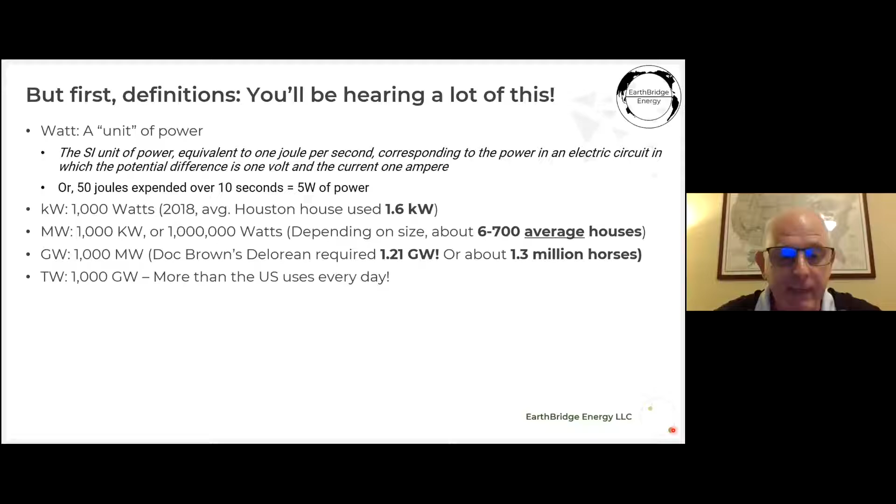It's also about 1.3 million horses. So if you're standing in the street and 1.3 million horses are coming to trample you, they will trample you with 1 gigawatt. It's quite a lot. And another 1,000 up is a terawatt, and that is actually more than the US uses every day.

Other things you may hear: a kilowatt hour. If you use 1 kilowatt for 24 hours, you have used 24 kilowatt hours. Very simple. A megawatt hour is about 1,000 of the above. New York City uses around 11,000 megawatt hours daily, which is around 458, 460 megawatts. So quite a lot of power.

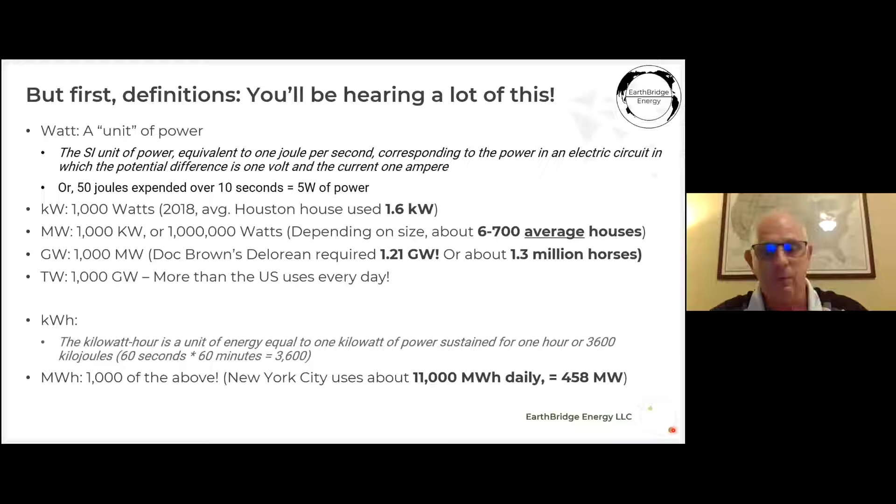I understand that you can write questions in or answer back, but I'd like you to think about it. What has access to abundant energy done for us? Imagine what it would be like if you didn't have energy. Has anyone got any ideas? Anyone want to open up and say something?

Silence is deafening, let's give some clues. We live in the modern day, the modern day life, we rely so much on energy, just about everything we do. Anyone uses the Xbox, you turn the TV on, we're going to do the cooking, dishwasher. Think of what life would be like without energy, without jumping in the car to go down the road. Another thing to think about as we move on is, do you actually worry about leaving a light on when you go out? And if you don't, why not?

Okay guys, someone speak up. How much electrical energy does the US burn through every year? A: 1,000,000 kilowatt hours, which is a gigawatt hour. B: 2 billion kilowatt hours. C: 4,000 billion kilowatt hours. Or D: 2 billion megawatt hours. What do you think, A, B, C, or D?

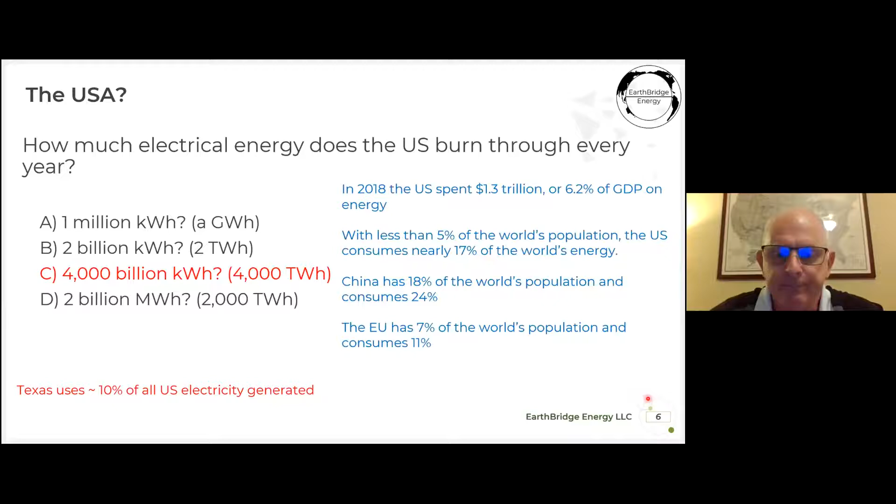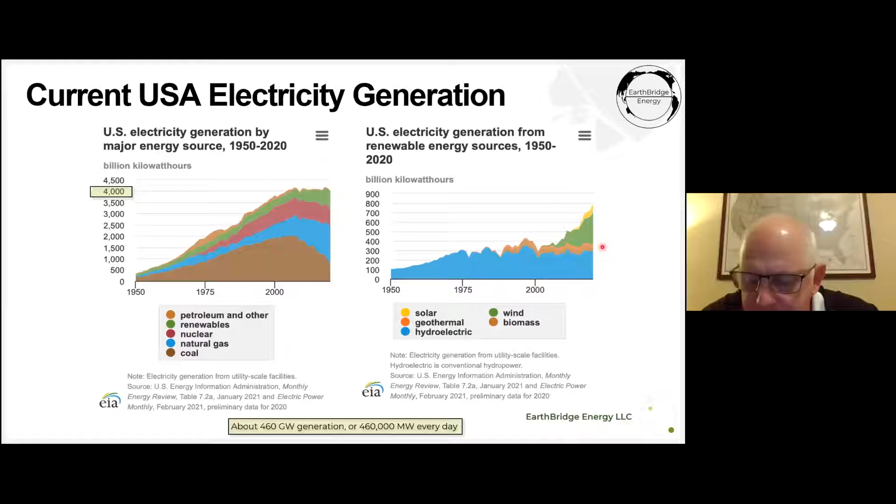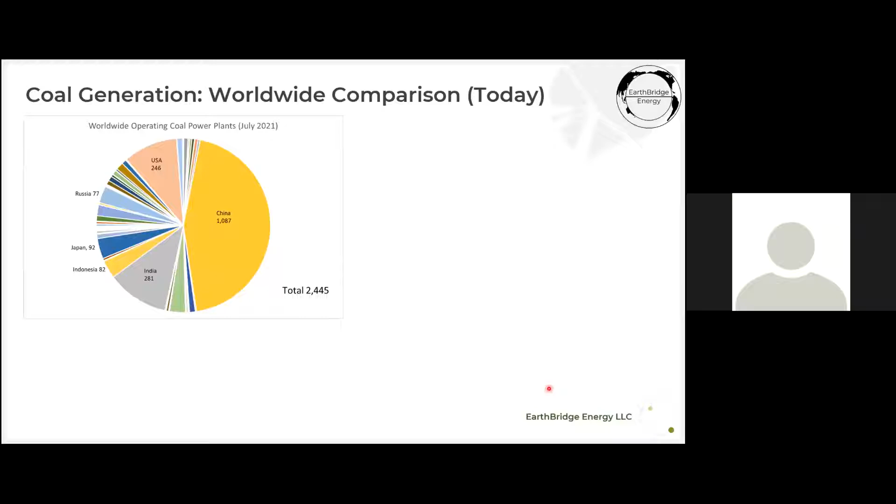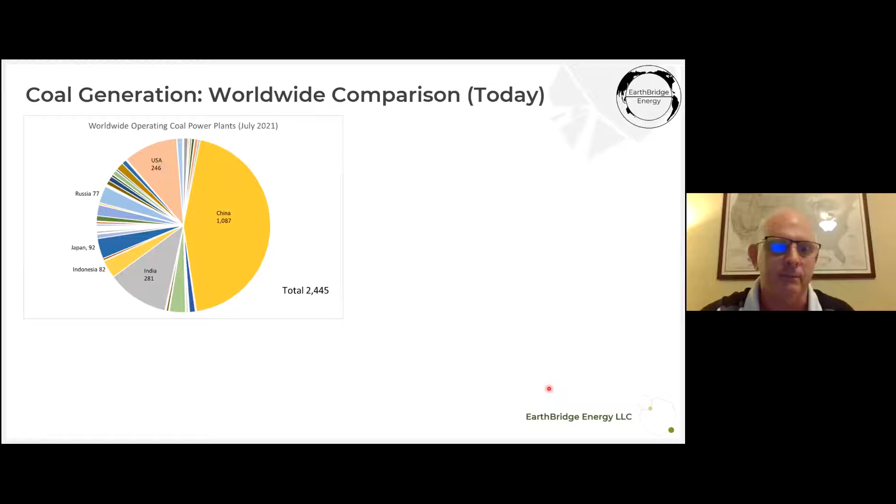Worldwide, as of July 2021, this is the number of operating coal plants. You can see China has by far and away the largest amount, followed by India. The US, as you could have already seen, is actually reducing the amount of coal it's burning, which is a good thing. But China's economy has leapt forward in leaps and bounds, and to power that you need a lot of energy. Coal is something they have in abundance.

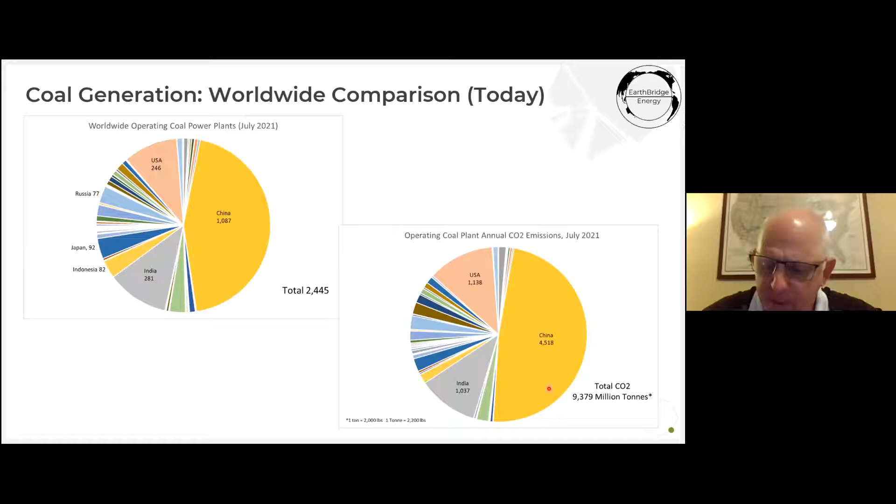Worldwide coal emissions, though, the US is actually just ahead of India, but China is about 4 times as much. That's about 9.4 billion tonnes of CO2 emitted by coal power stations every year. And if you're not worried about that, you really should be. That isn't good.

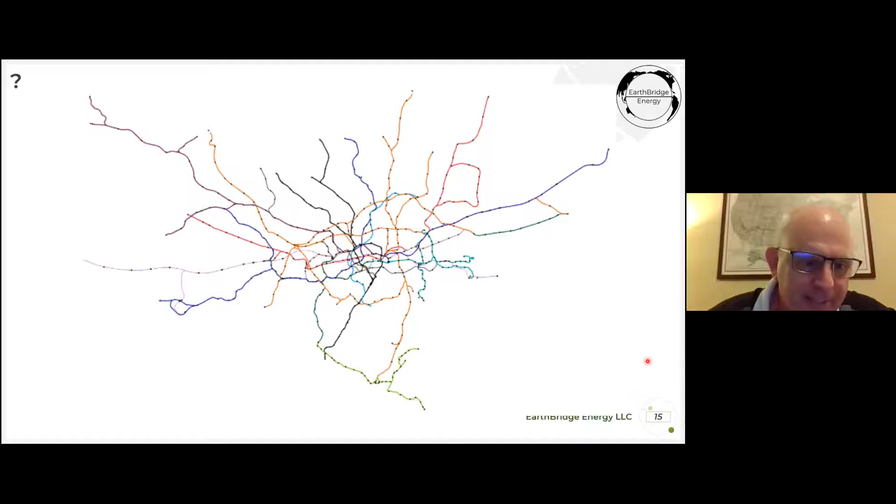Everyone get on chats and tell me what is that and where would you find it. Looks like London - we have an audience member who says it looks like London. Yep, the tubes, that's right. That is London, and Squib has said the tube is right. Mark Stem, DC, I'm sorry, you're wrong - it's London.

Go, how about this one? I'll give you a clue - if you dangle your feet in that river, you're insane. That will be - that's right, Jeanette has replied - Paris, it's the Paris Metro. A bit closer to home.

New York. New York City. Correct. And finally, this one. Real close to home, real close to home.

Come on, people, type it out. Where do you find this? Like Houston's, one track going nowhere. Absolutely right, that is Houston Metro.

Here's a map of London. Okay, let me just show a couple of things. I used to live here. I could walk to here, get a train down to here, and I worked here. I could get a bus or I could walk.

My sister now lives here. You walk to here, you get a train into town. This is about 25 miles from here to here. London actually goes around here, not this bit. It's about 20 miles there to there. So it's very easy to get on a bus or walk to the station.

Houston, on the other hand, we're all up here. I'm almost off the map. I'm down here. Gus lives around here. From here to here is about 25, 30 miles.

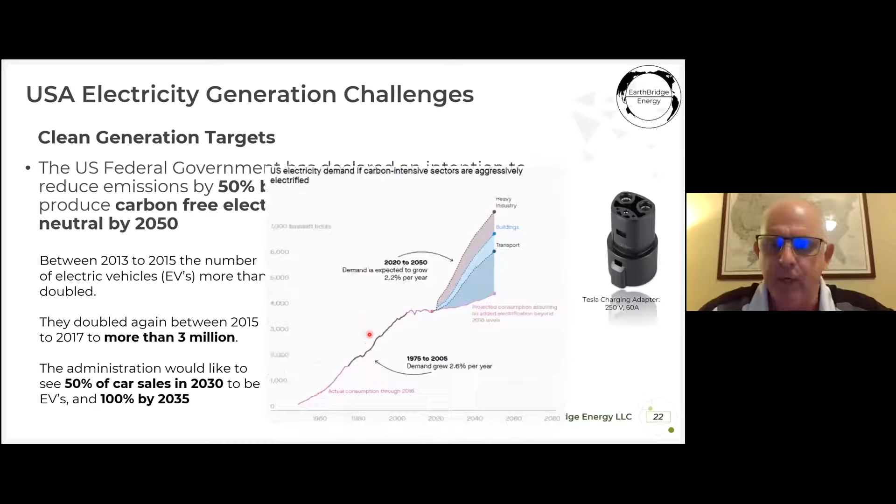Right now, the forecast from the EIA is we'll end up around here by 2050. But if America is to aggressively electrify to meet the transport issues, or the transport forecasts or wishes, if you like,

also power its buildings by electricity and not gas. You may have heard in California, some places they're regulating you can't cook with gas anymore. New houses have to be electric. Heavy industry, electrify it. Your forecast goes from around 5.5 billion kilowatt hours to 7.5.

And it's no use taking gasoline vehicles off the road if you're going to transfer the electrical generation problem somewhere else.

You see, the thing about Houston is realistically, it looks like this. There's a lot of car owners, limited public transport. And if all these people here were to turn to electric vehicles and come home at 6 o'clock at night, and we generate the power by coal, you've increased the problems.

Because for about every kilowatt you burn at the house, a coal, gas or nuclear station has to burn around 2.5 kilowatts because they're not 100% efficient. And just for information there, every gallon of gasoline burned creates 8,887 grams of CO2. That's a very good measurement.

That's about 20 pounds. So you drive off and you burn 10 gallons on average, you've burnt about 200 pounds of CO2. So we really must try and clean up the transport sector.

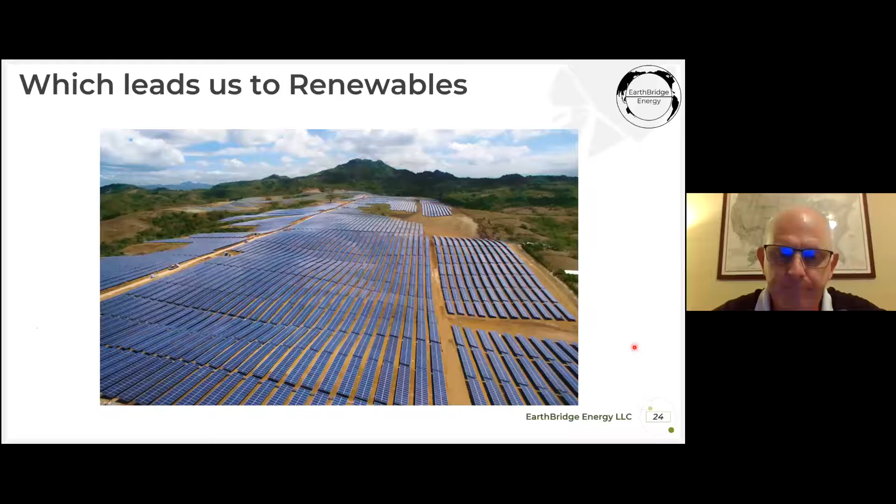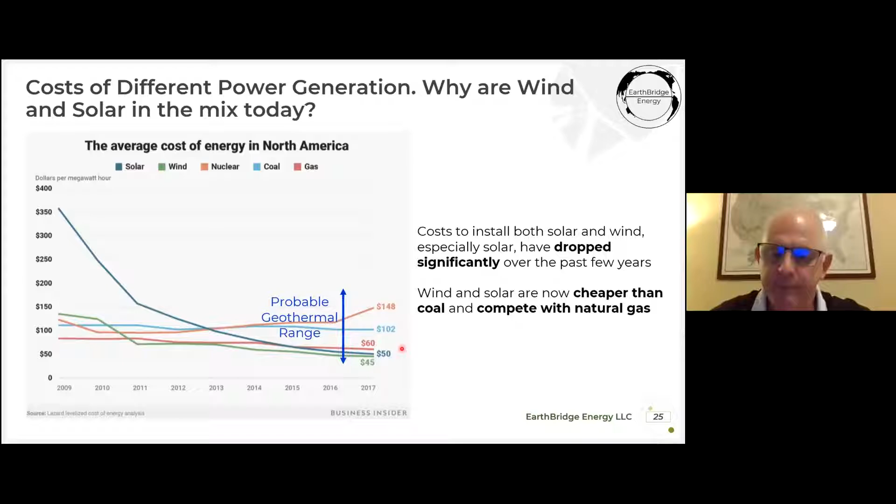Now, there is an issue, and we mentioned it before. Wind and solar are intermittent. In technical terms, we say they're non-dispatchable. You can't just turn them on and off when you feel like it. The sun doesn't shine, you don't have solar. Another thing about solar is they're mainly out in sunny areas. They're also dusty. If you have a big dust storm and dust is deposited all over the panels, they can't produce as much power as they're designed for.

Wind, especially in Europe, has a lot more offshore wind farms being developed. It's windier offshore, and you've just seen in the US they're talking about building an offshore farm in the northeast - very windy. But if the wind isn't blowing and the sun isn't shining, then what do you do? Well today you turn to coal, gas, or nuclear, or hydro if you're in that area. Battery technology, although it is improving - compared to the first batteries ever made, I read somewhere it has improved the power it can hold and distribute only about 4 times for chemical batteries. So any idea that, whatever Tesla says, we're going to put lots of batteries in and solve the problem - it will be a very short-term solution, and they only last a couple of hours.

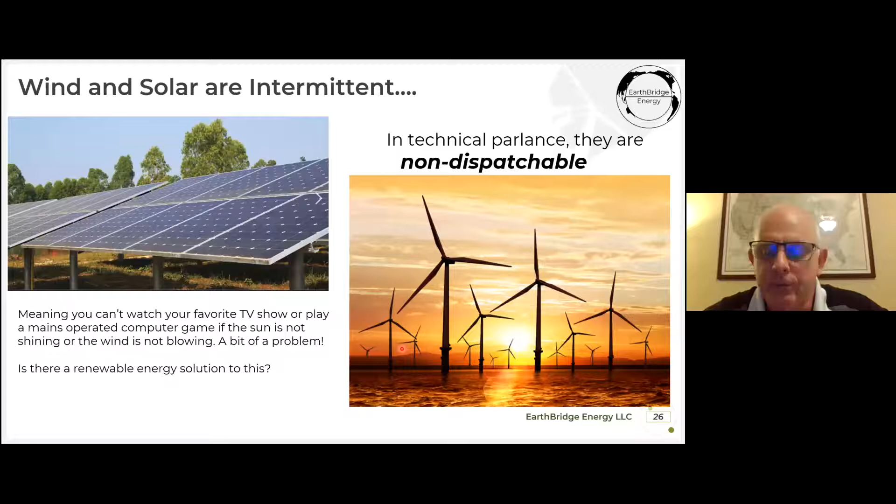But here's a couple of issues with solar and wind that many people don't understand. The capacity factor is an average of how much electricity or power it can create over time. The sun may shine from 7 in the morning to 7 at night, but it's not always at its very height. In the early morning or late afternoon it doesn't give the same energy, and on a cloudy day it doesn't give the same energy either. So we take the high point, nearly 30%. If you came to me and said, Paul, I need 1 megawatt of solar power, I'd have to install 3 megawatts so that on average you would get a megawatt. Now, that's fine, you can do that.

Another thing is the footprint. It's about 60 acres, or 5 to 6 acres per megawatt. A similar geothermal plant will be in 5 acres or less and give you 10 megawatts. In Louisiana right now, the farmers are up in arms with ideas from the state to have more solar because it's covering up the land. And if you're a farmer and your land is being taken off you, you can get upset - you can understand that.

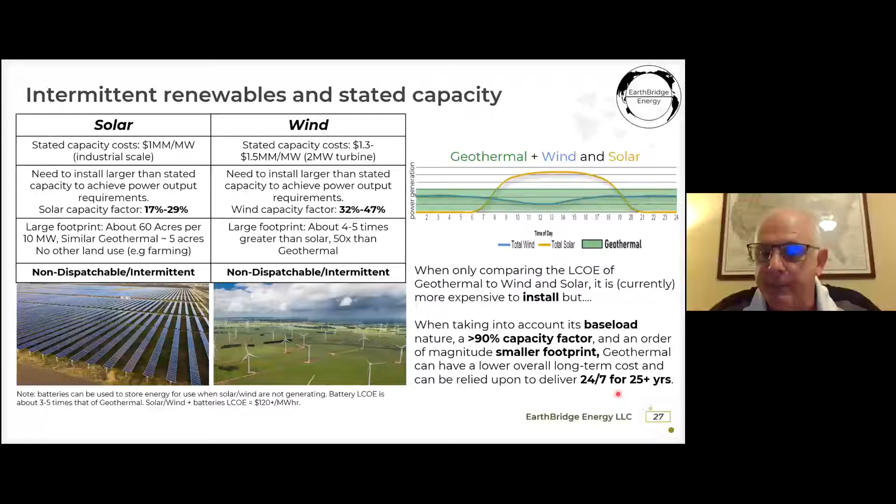So what is it? When we talk about geothermal, it sounds great. It literally is heat within the earth. It comes from those two Greek words, geo, earth, and therm, heat. The thermometer, same word. And it's a renewable energy source because right in the middle of the earth, we have this inner core, which is about 10,800 Fahrenheit or 6,000 centigrade, which is hotter than the surface of the sun. And you can see here as you move up, things do cool down.

But you've seen it on TV, you have volcanoes from time to time. Heat comes to the surface. Iceland is very volcanic, we'll mention that in a minute. You also go to places like Yellowstone, you see the geysers, very, very hot water. So not too far under our feet, depending on where you are, it could be anywhere between say 1,000 feet down to 10 or 15, 20,000 feet. It's a lot of heat energy.

For those of us who've worked in the oil industry, especially people like me who've also worked offshore from time to time in a freezing North Sea, when the wind is blowing through those platforms and you wish you were somewhere else like the Sahara Desert, you can wrap yourself around one of the oil export lines and it is really hot. So there is a lot of heat. In fact, the Earth emits more heat every day - it could feed the Earth's electricity demands over twice as much.

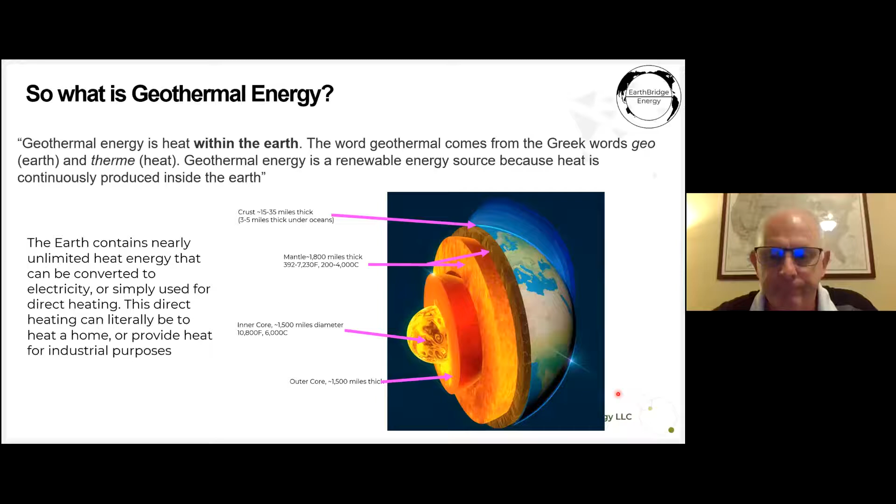Worldwide, this might surprise you, the US is number one, mainly in California. There is a plant in California which produces well over 120 or 130 megawatts of electricity. That takes its power virtually from a direct steam source, which is very powerful. And there are other ones around which take it from hot water.

Now, the majority of the world's geothermal is near heat sources. If you look around here, you've probably heard of the Ring of Fire in the Pacific Ocean. There's a lot of volcanoes around here, earthquakes, very famous - San Francisco, of course, Mount Hood up here, the volcanoes. So all around here, the Ring of Fire, there's a lot of heat near the surface. In New Zealand, you can go and watch it bubbling up from the surface in mud pools.

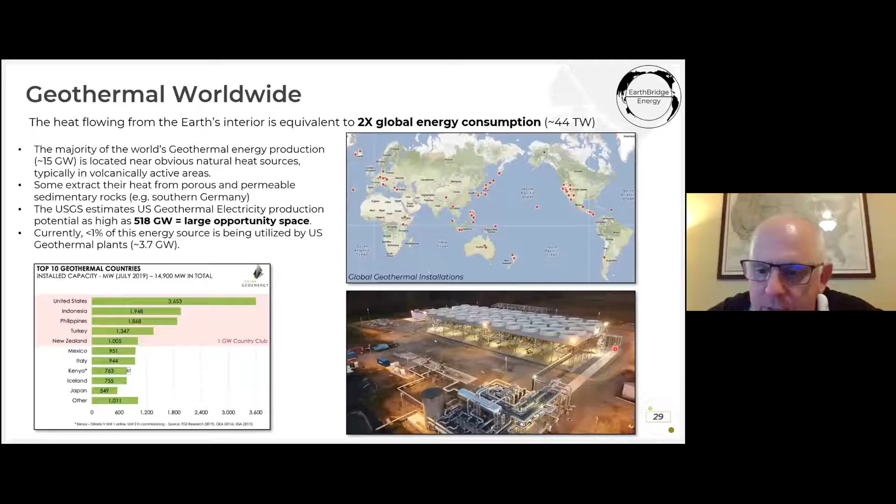Iceland is another area, strong volcanic activity. And in Europe, there's quite a few smaller plants which are taking hot water out of the ground and using that. By the way, we'll come back, I'll show you a picture of this in daytime - that's how small a plant can be, you could put a person next to that. The biggest thing is this area we'll discuss, but they're actually very small and emission free.

What types and uses? In this blue box here is the kind of temperature range we're looking for to produce water from the ground. Anything over that, it's so hot it actually is steam, and you can use that steam directly as in a conventional power station to go straight to the turbine. I will explain why we're in this area, and I'll come back later on and show you the many other things you can do with geothermal aside from making electricity.

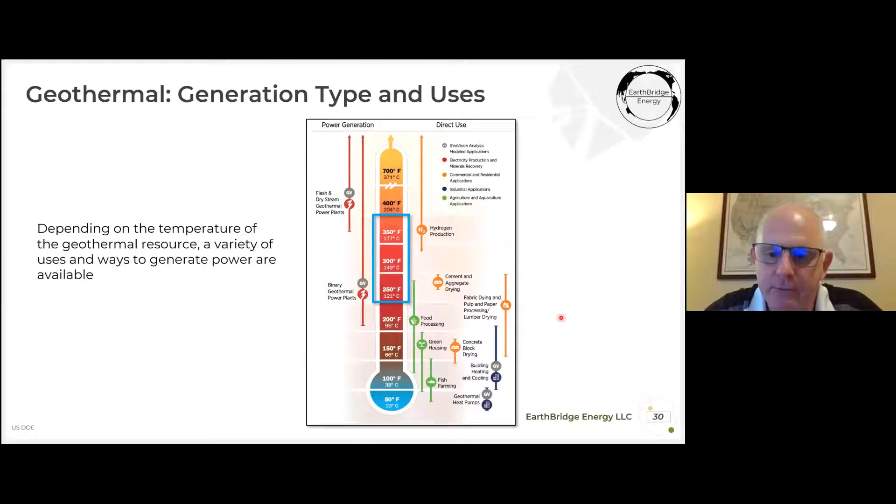This is what we are looking at as a company. We're looking at what's called sedimentary geothermal. I'm sure many of you here know the oil industry quite well, maybe through parents or friends working at it. A lot of the conventional reservoirs we produce from, like sandstone, for example.

If you put those under a microscope, they are full of holes. Anywhere between 15 to 20% of the rock you're looking at is empty, and that's what contains the oil, water, and gas. Now, what we're looking for isn't oil or gas, it's just the water. And at the depths they're at, they're very hot. These reservoirs are also what we call very permeable, which means the liquids can flow through them very, very easily.

So you don't need to frack it. Fracking means you need a lot of energy at the surface to pump water and chemicals down and sand to keep it apart.

We know these reservoirs here very well. What we would do here is take the hot water out. It flows out the ground, goes into your organic Rankine cycle plant, and the cooler water is injected back in. Through time, it makes its way back to the producing well, and as it heats up, it comes back and it cycles. So you maintain the reservoir pressure.

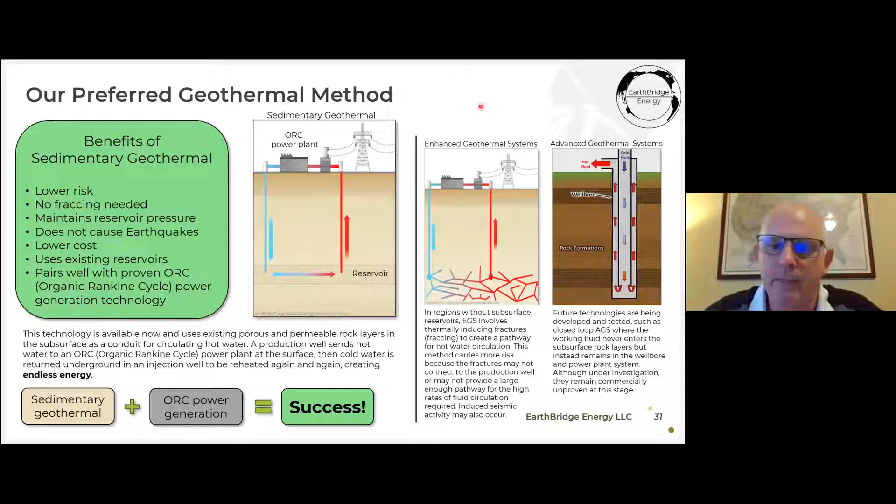Someone said, is geothermal energy centered around fault lines? The answer is yes, it can be. We can discuss that later on with the questions. Yeah, Paul, I was going to hold them till the end if it's okay. Yeah, that's fine. Okay.

Just a quick look. How is electricity generated, in case you don't know? They're called thermal plants because you're heating them up. Some people say they don't want nuclear because the electricity is nuclear. It's rubbish. Coal, gas, oil, nuclear - what it is, basically, is it heats up water in a boiler, turns to steam. The steam drives the turbine, drives a generator, and that produces electricity to your home.

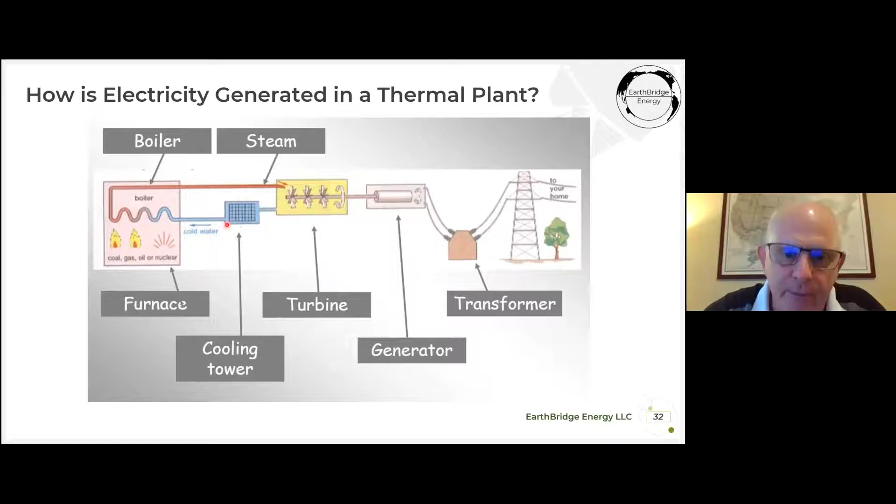So what's the difference? There's a cooling tower. When the water comes back out, you've got to turn it back into water again to reheat it, to make it efficiently turn the turbine - water, steam, turbine, etc. It just goes around in a circle.

I'll try my best to explain this.

It's very simple, really. In the organic Rankine generation plant, the water from the reservoirs isn't hot enough to drive a turbine. But what you do is go through what we call an evaporator, regenerator, and condenser. They're all heat exchangers. That's all it is.

The heat is taken from the hot water into a fluid which is organic, like butane or pentane. It has a lower boiling point, which means it will turn to the equivalent of steam at a lower temperature. That steam then drives the turbine, which drives a generator.

The fluid is then taken back to the regenerator, into the condenser and a heat sink. This is where the heat is taken out of it. We'll see a picture in a minute showing you that most of the plant is actually taken up by taking the heat back out of the organic fluid, so it can be pumped back into the heat exchangers to be used again.

There are over 450 of these plants in the world today producing electricity, and about 20 in the US. It's been proven, and the technology is improving all the time.

Another thing is, we talk about the reservoir, but other heat sources are viable. This technology is used a lot. You may have heard of people taking wasted heat energy up flues or chimneys in factories and turning it into power. They use the organic Rankine cycle. Instead of hot water from a reservoir, they use hot flue gases in the heat exchanger, heat up the fluid, and drive turbines. This technology comes after a guy called Rankine, a Scottish guy who died around 1870 or 1880. This isn't new physical theory.

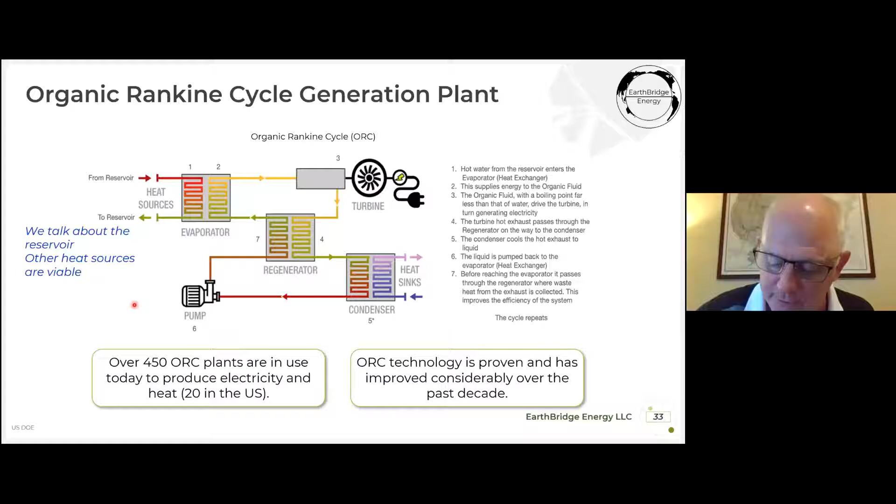Unfortunately, the ORC plant isn't 100% efficient and not all of it is turned into power, but water contains a lot of energy. Just remember that.

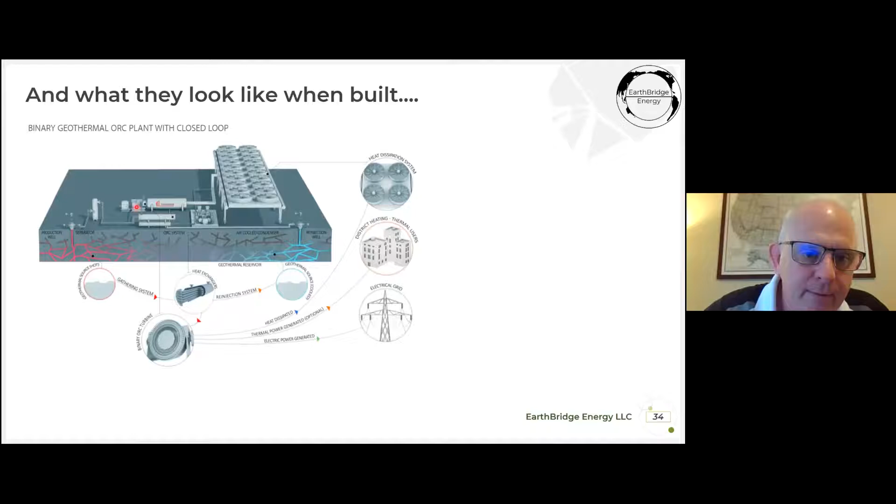What do they look like when they're built? Well, there's your well, there's a separator, it goes into the heat exchanger, through the turbine, and all of these are to cool it off through recycle, if you like, it goes back round. The organic fluid goes back round here, and it just repeats. Instead of water steam, it's an organic steam. And that's what it looks like.

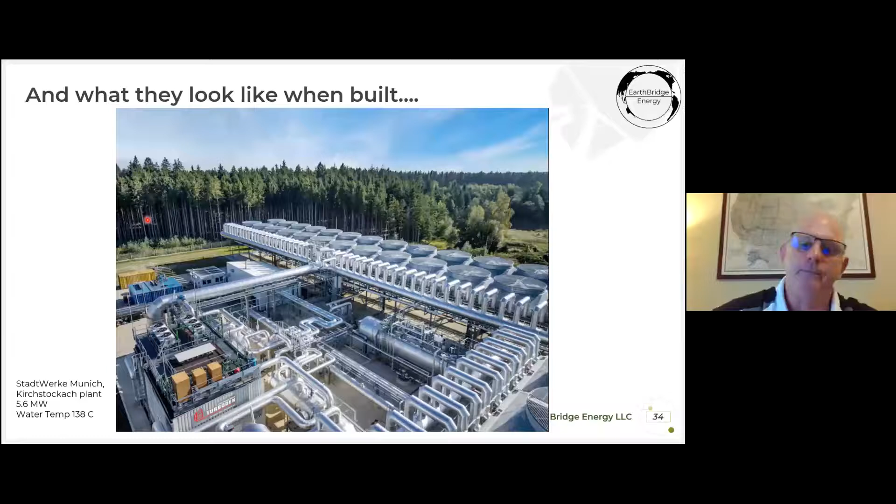So we're talking about this bit here, binary geothermal power plants, 200 to 350 Fahrenheit, around 100 degrees C up to say 200. Look at all the other things you can do.

Around here, for example, they're doing this a lot in Germany and Iceland. You take the hot water and pipe it to houses to heat the house up. But look at all these as well: onion and garlic drying, food processing, lumber drying, soft drink carbonation, geothermal heat pumps.

People are talking about this a lot recently, about new houses being built and taking the heat from the earth in your own backyard. So there is a lot of stuff you can do with geothermal. You don't just have to turn it into electricity. You may have what's called dual plants where you create electricity and also send the water to district heating.

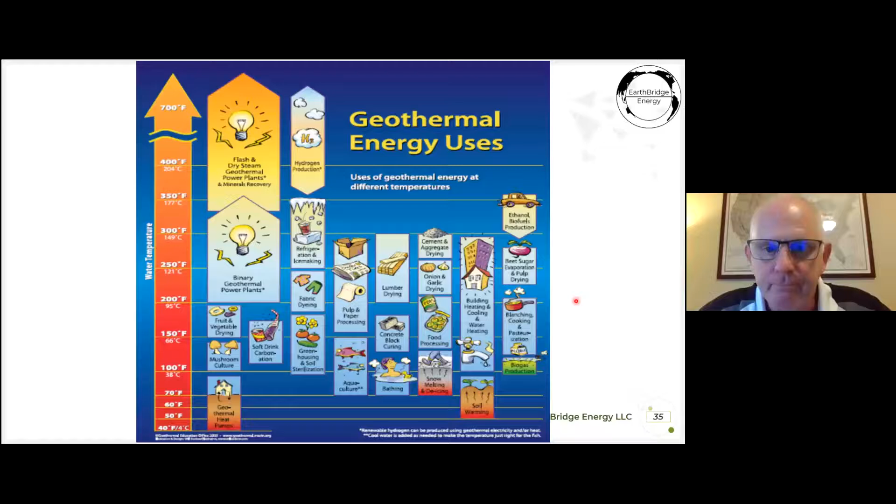In Iceland, it's a very hot place. Almost every building in the country is heated by hot spring water, and more than 50% of its power is from geothermal sources. They are wisely using something that's been handed to them free.

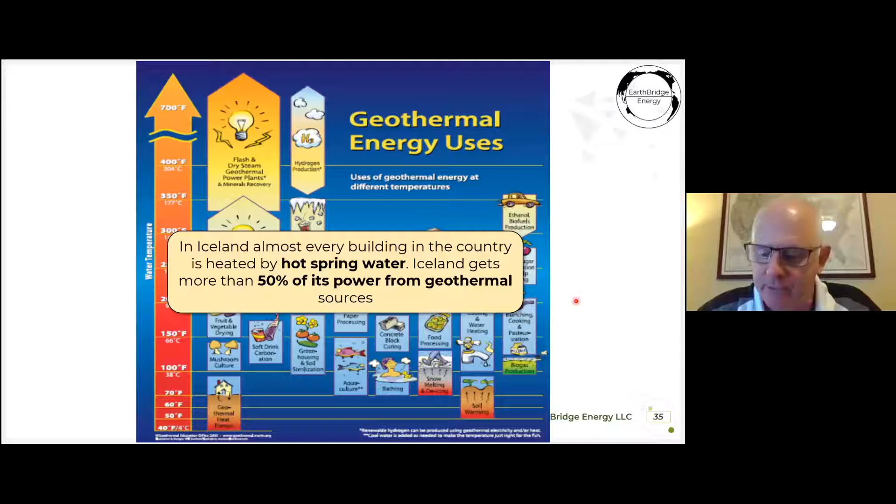One of the issues we have with electricity, outside of things like hydro where you can fill up your dam and store energy, is that you can't store energy from solar very easily. The batteries we spoke about can hold a charge for a couple of hours, and they don't give out as much energy as you need. The whole city of Houston would need thousands of batteries, and you'd drain them very quickly.

But I just told you that water contains a lot of energy. What we find sometimes in some parts of the country, wind in Colorado, wind and solar in Texas, is that they can generate so much electricity it can't be used. What happens is the authorities give them very low pricing, or even negative pricing, trying to dissuade them from putting their power into the grid.

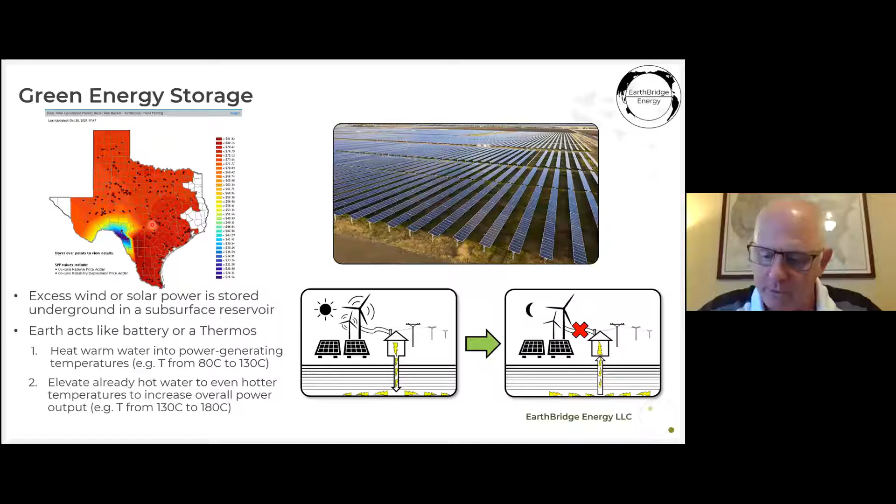If you could take that power, literally while it's free, and heat up the water as you pump it back into the ground, that energy would be stored for later use. You could make your reservoir even hotter than it was to begin with, or at least maintain power. Because it's already down in a very hot environment, it will not lose that energy very quickly. When you need it, you can tap it and use it. This is what we call an earth battery idea, and it's something we'd like to look into further.

There's a few facts about geothermal. They're subject to the same environmental considerations as the oil and gas sector, which has many laws about the environment. Whatever you might think you heard in Congress today, Derek, Gus, we've all worked in it, and I'm very proud to work with companies who do take it seriously. In places like Texas, you need to drill wells for geothermal, and all these laws already exist. It's not as if we're going to the government saying we want to try something different and waiting years for them to understand it.

I don't know how many wells have been drilled in Texas. I wouldn't even like to hazard a guess, but it's probably going to be a million plus. And we know very well now how to protect ground drinking water and stuff. Very, very strict on that.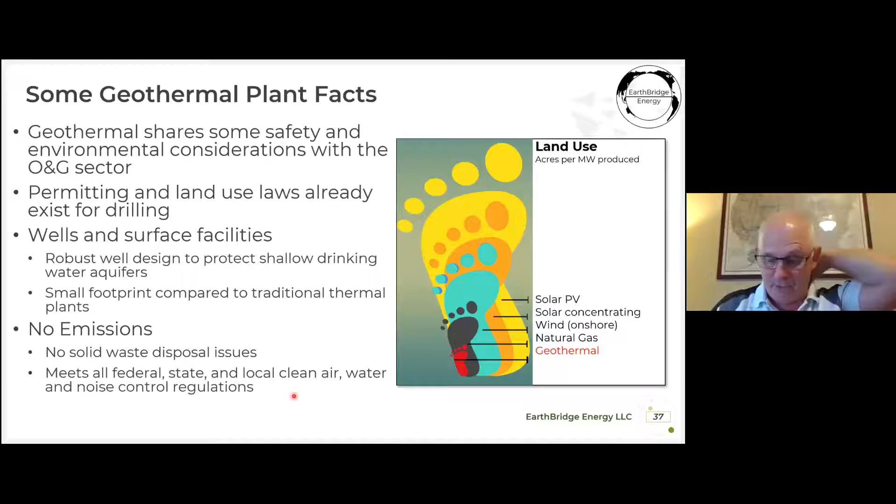Another thing about geothermal, we said no emissions. You may remember looking back at the coal-fired power station, I didn't mention this at the time, but one of the byproducts isn't just carbon and sulfur, it's ash. When you finish burning coal, it hasn't completely disappeared. You have lots of sludge left, lots of bits of burnt coal, and you have to dispose of that. Again, with geothermal, you don't have to do that. It will meet all the federal, state, and local clean air, water, and noise control regulations. These plants are almost silent. The only moving part really is the turbine, and that's going to be in a box. You don't hear it.

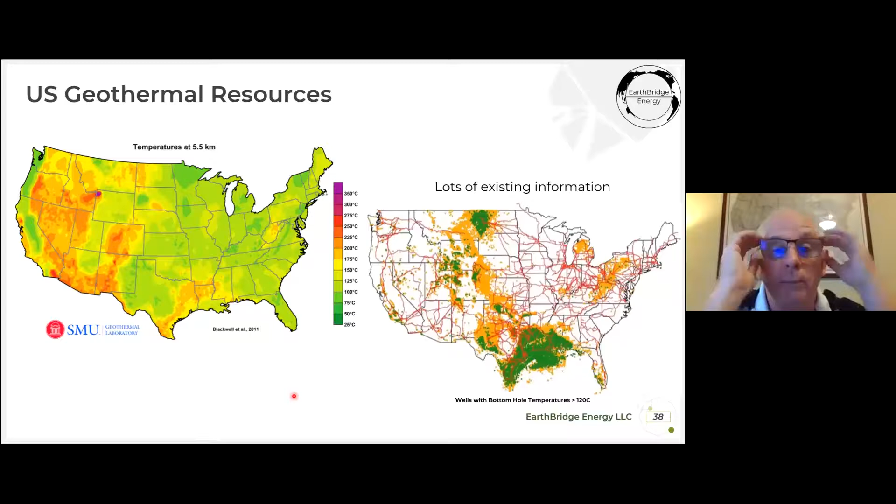So where do we find these geothermal resources? The map on the left shows temperatures that we know of at 5.5 kilometers, or about 5,500 meters, roughly 18,000 feet. That is quite deep. You'll notice that all the warm colors, the oranges, yellows, reds, fall around here in the west, but there's a big swathe right through the Gulf Coast of Texas and a little bit up in West Virginia.

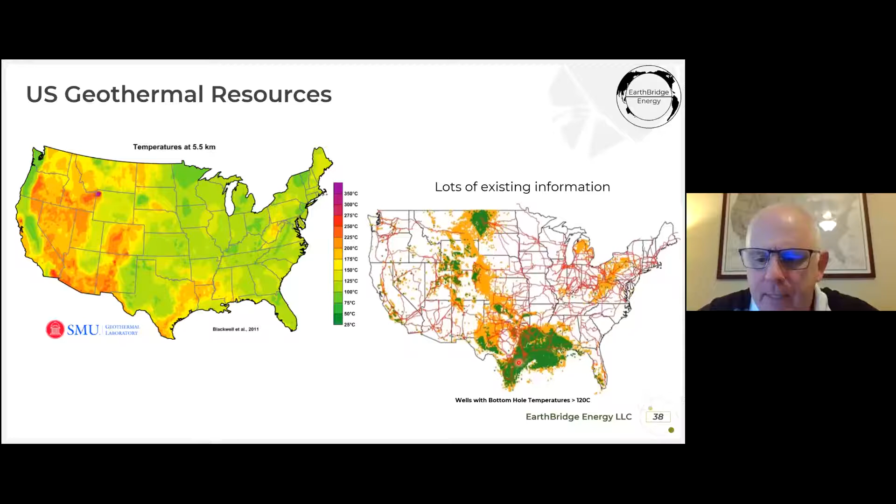This map here, which looks like a rash, shows wells with bottom hole temperatures greater than 120 degrees centigrade, which is the low side of the temperature you need to start making geothermal work. Some of these will be 180, 200 degrees. You can also see that Texas is awash with data, look at the points here. This is the Marcellus over here, this is the Bakken, the Permian Basin. The amount of wells drilled here is phenomenal. We have a lot of information about these reservoirs, and that's very important, as we'll see why.

You're going to say, why are there so few geothermal plants today? Well, the cost of geothermal is quite expensive compared to conventional, unless it's situated right next to a hot spring or steam vent. Someone asked about faulting, yes, faults can transmit steam to the surface. The energy of steam vents is substantially higher than water. If I remember rightly, you can get 4,200 joules out of a litre of water for a 1 degree drop. If you turn that into steam, it's like 2.6 million joules. There's a lot of energy in steam.

Thanks to fracking, natural gas prices changed a lot. Around 2009-10 when I was here, natural gas was going up to $11 to $12 per 1,000 cubic feet. It dropped down to less than $1 a few years back, and it's rising again now to around 4 or 5, but it's a lot cheaper than it would have been without fracking. Gas emissions are about 40% that of coal, so it's called a displacement fuel. It got cheap enough to be cheaper than coal, and fortunately it's also a lot cleaner, but it's not fully clean.

There's enough electricity being generated that you can see here on this map, around 2007-8, coal bars start getting smaller as natural gas starts coming up.

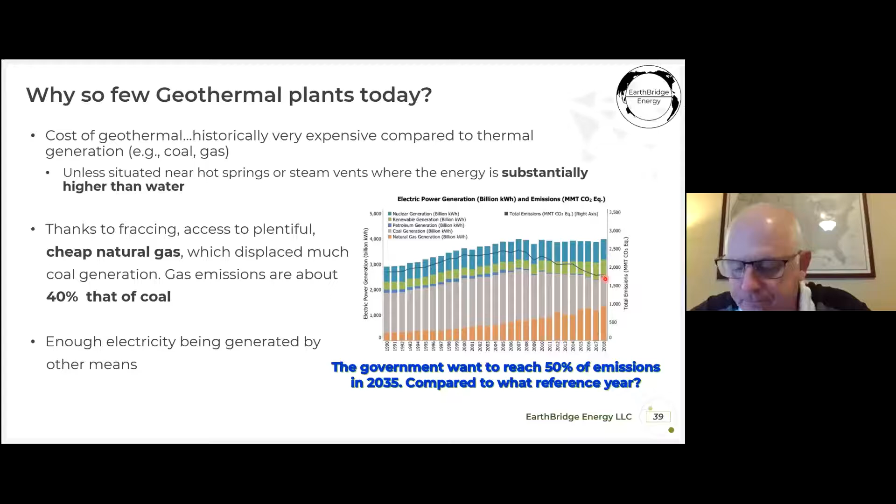Another thing about geothermal, this is an issue many investors have seen in the past. If you don't know what's there, like in oil and gas, you need to explore. You need a pre-survey and exploration. This normally involves seismic work, understanding all the squiggly lines people like Derek look at, saying this looks like an area we could explore in, drilling a well at great expense, testing, and so on.

And then you decide, do I have enough resource to develop this oil field? In places like Texas, though, with so many wells drilled, in the vast majority of cases we can eliminate these costs because we have the information. Millions of wells, hundreds of thousands of data points in the Texas Railroad Commission, telling you a lot about the permeability, the rock type, the temperature, the flow rates - all the things you used to spend millions and millions of dollars on, you don't have to.

Our task is to reduce these costs of well field development. Geothermal plants cost whatever the plant costs for that rating, say 10 megawatts, 20 megawatts. But depending on the quality of the resource, that will depend on the number of wells you need to drill. The fewer wells you need to drill, the cheaper it is, the cheaper the electricity. That's the challenge we're facing. One advantage of the oil and gas industry is that there are many people with this kind of experience now moving into this sphere.

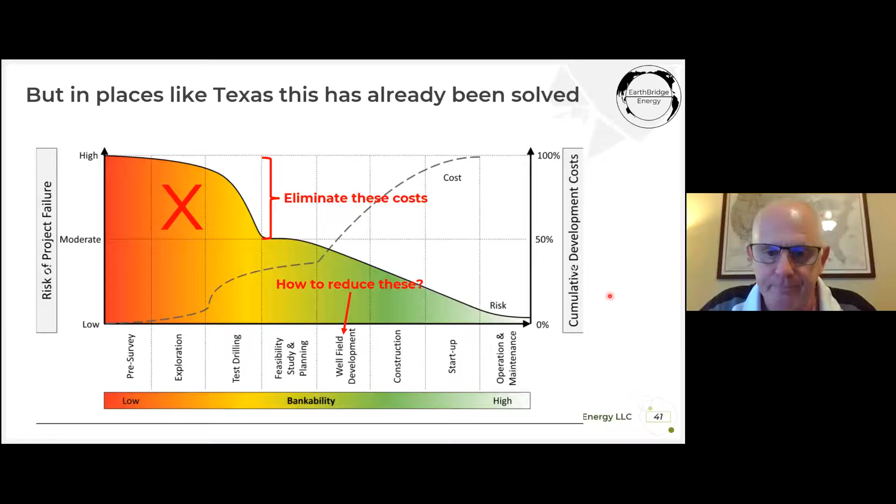So they're looking for other forms of investment. There's many things you can invest in, obviously, but energy use in the developed and developing world is set to increase. And if we're going to do this successfully and keep our planet from warming too much, we need to look at alternatives. Investors are now looking to invest in greener fuels. Solar and wind have already had lots of investment. We think geothermal is going to be the next.

Another thing is how prices drop. If demand goes up and people want more, manufacturers tend to produce more, and as they manufacture more and get more efficient at it, the prices drop. That's an example with solar. Utility tracking, by the way, is expensive solar - that's where it follows the sun. But don't worry about all the three types shown there - the fact is the costs are coming down.

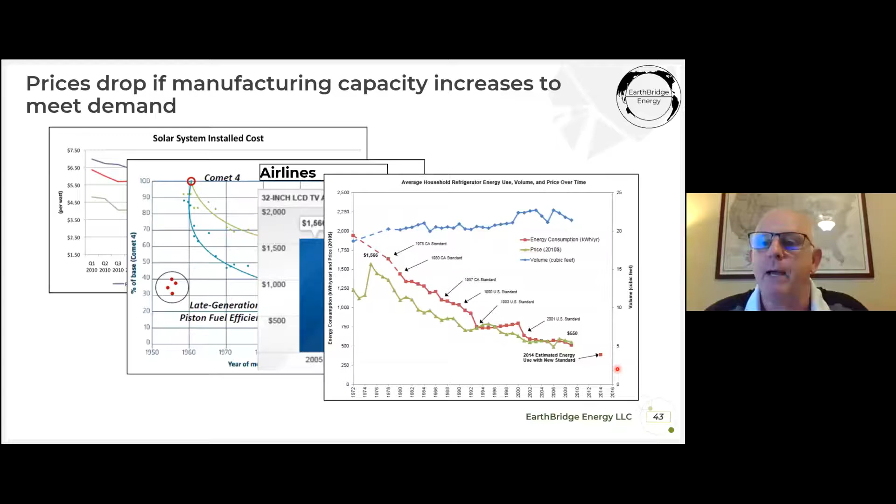100 years ago, most people listening here probably couldn't afford a car. Now we're a 4-car family. Things are getting cheaper. We believe the same thing would happen in geothermal—if we and other people can start this off, the people who make the plants will be able to drop their prices, and therefore it will become cheaper to develop, the same as other energy we've seen like solar.

But renewables of all kinds do have a bit of an issue today, and that issue is it depends on your location.

You've seen this map already. By the way, does anyone know what this little dot is here? Yellowstone, yes. This would be the perfect place to put a geothermal plant.

I don't know if you've been there, I have. It's one of the most amazing places. I've been to over 45 countries, and this is one of my favorite places. Keep it pristine, but it's a great example of energy coming to the surface that can be used if you so wanted to.

Okay, if we're in the solar business, you look at this map—photovoltaic solar resources. As you can see, Southwest Texas, New Mexico, Arizona into Southern California, and Utah have a lot of sun hours. This is in kilowatt hours per meter squared per day, and it goes up quite a lot. The sun gives a lot of energy.

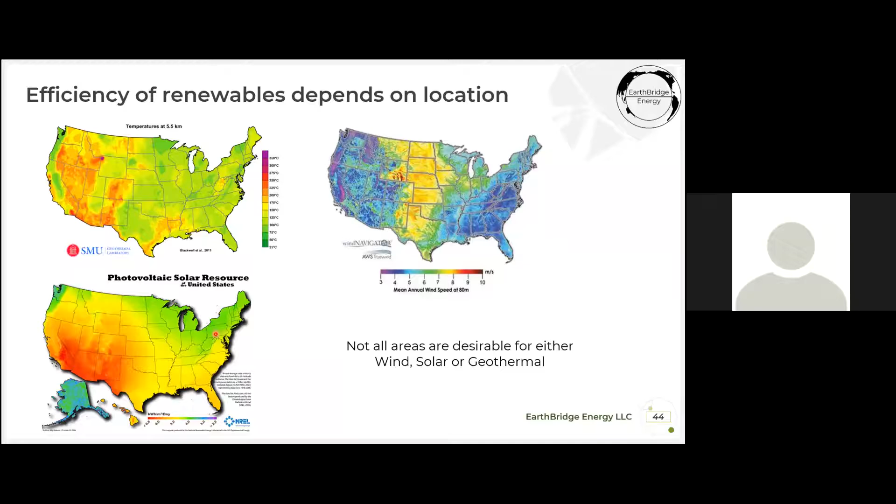Anyone like me knows if you stand out too long, I turn into this color. But if you're up here, you can still put solar in—just expect it to be generating the same kind of power as this does.

Wind—remember, I showed you where all the power stations were, and I might have mentioned there's a whole swathe of wind generation through here. Well, here's why: this is the mean annual wind speed at 80 meters. It has to be off the ground.

So when people say, oh yeah, the politicians like to take credit for things—we've got a lot of wind. If I was going to spend $1 million on a windmill, I'd rather put it up here and generate twice the power as putting it down here.

The reason you have wind here and solar here and geothermal in some of these areas is that's where the resource allows it. If you're up here, you don't get much sun, you don't get much wind, and you don't get much temperature—so you could easily put a gas or coal power station there. This is the challenge we're facing.

I don't want to give anyone the impression that, hey, we've got the solutions and it's easy to solve—there are challenges involved. But up here, this area...

Offshore, you get a lot of wind, and this is why they're putting wind farms in here. If you fly from Paris or Amsterdam to Aberdeen in Scotland, you'll go over what's called the Dogger Bank off Yorkshire, the east coast of England. You'll see hundreds and hundreds of windmills. And Scotland has just signed an agreement to build the largest offshore wind farm in the northwest of Scotland.

I lived in Scotland for years—my wife comes from there. I can tell you it's a pretty cold, windy place sometimes. They will get a lot of energy.

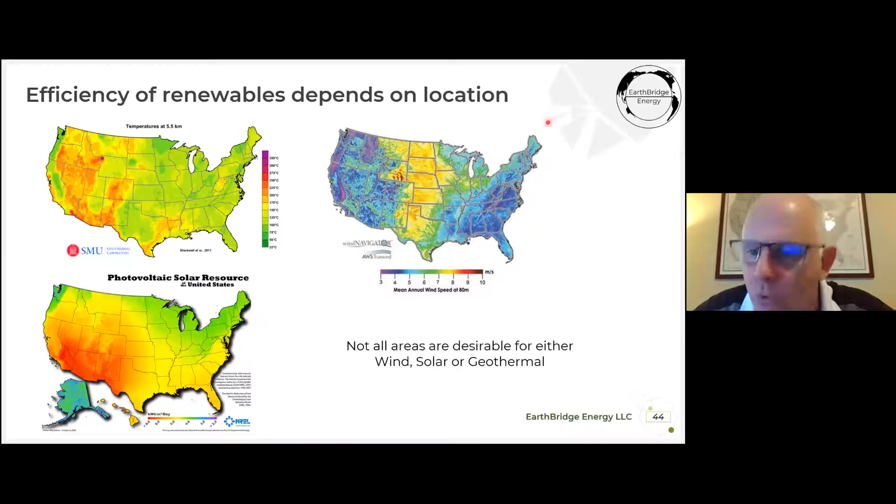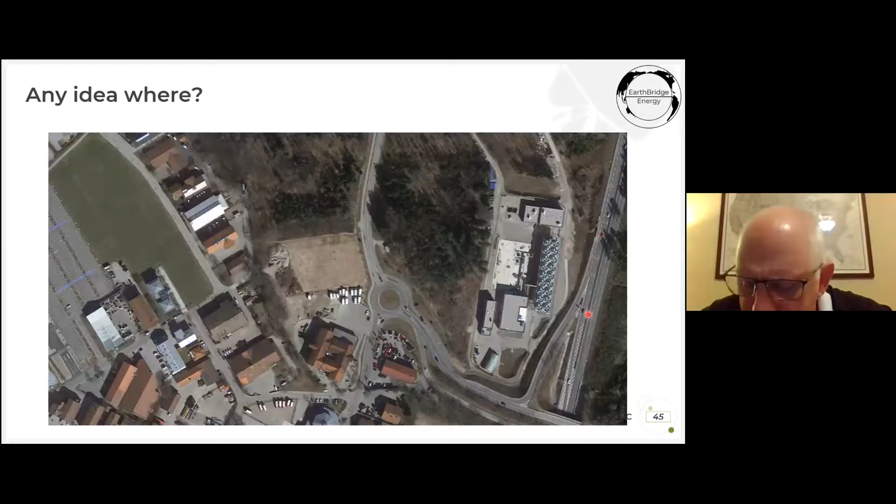And there's something here that looks quite interesting, though. I feel like a spy. You zoom in and it's getting a bit more suspicious. Must be a CIA plant. Actually, no, it's a geothermal plant just on the outskirts of the city, hidden behind the trees and the berm here. Most people there probably don't even know that the majority of their power comes from a geothermal source, which quite frankly is placed next to where they live or where their kids go.

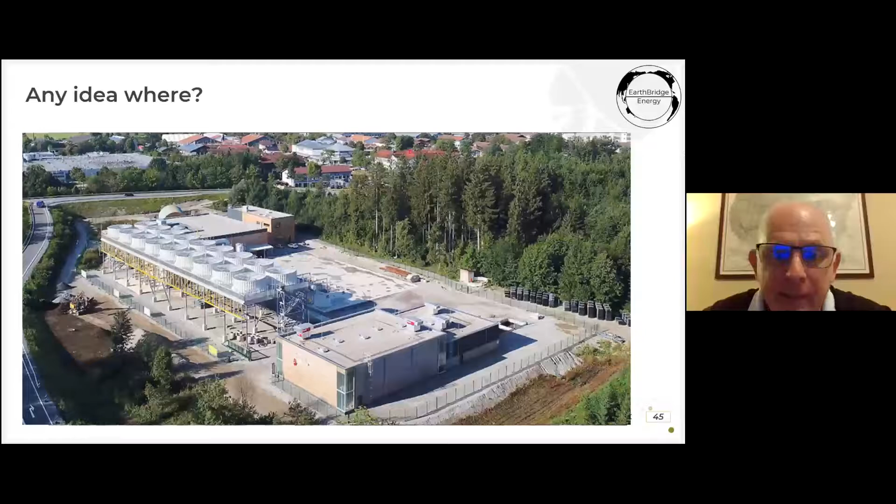Now you won't guess where this is. I'll tell you it's also in Germany. That is a geothermal plant. This one, I believe, is a drill that produces power and sends hot water out to most of the residences. You look at that, that looks quite modern art to me. I like the look of that. Would you mind living next door to that? Because actually it's in the suburbs of Munich, one of the largest towns in Germany, right here.

And it's next to what's called a gymnasium, which has nothing to do with exercise in Germany. It means high school. The Freiham High School, there is a geothermal plant right next to it. Now, why am I saying this? Because as I said many times, it's emission-free, almost silent. If you had the resource in the outskirts or even in the middle of a town, you could put a plant there, you could disguise it as a modern art museum and no one would know.

And just to let you know, around here, there is a gas-powered plant which recycles a lot of its waste. Next to it is a geothermal plant, almost in the center of Munich, which is feeding 80,000 people with hot water for district heating.

Really last question. How can we all play our part? What is it we have to do to make the future cleaner? No one? I'll take a guess. Let me show you this.

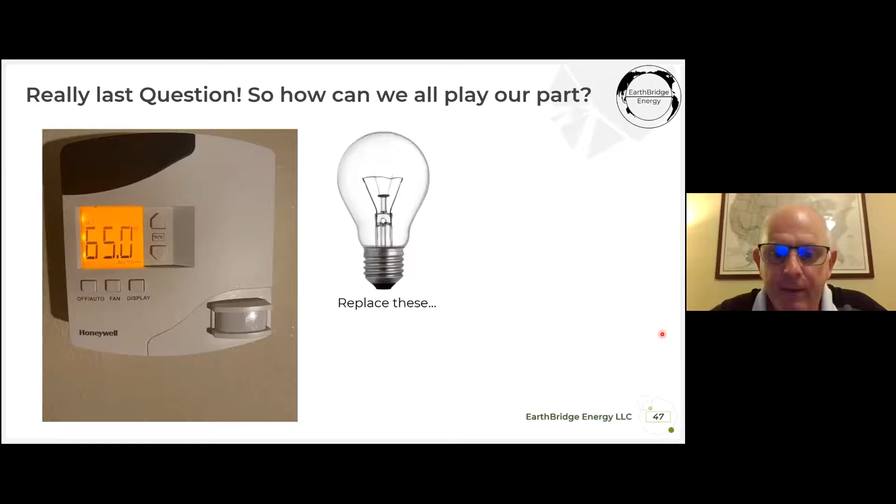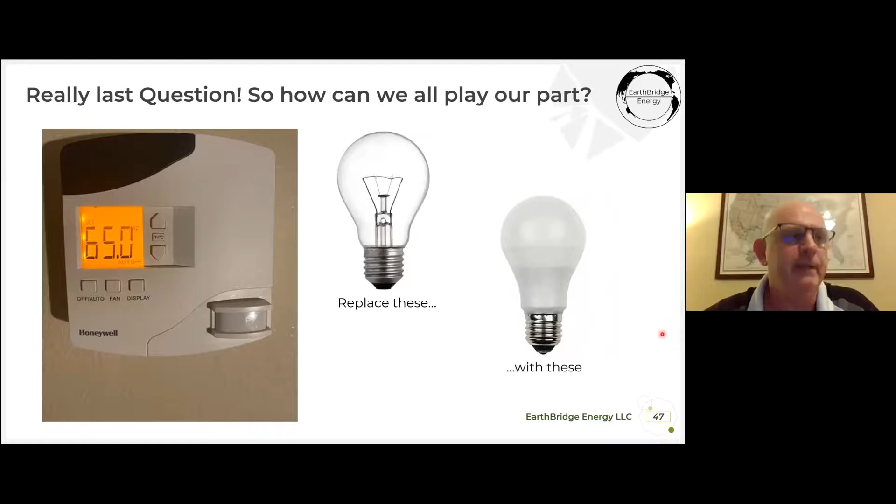Replace these with these. They use up a lot less power. I'm going around my house doing so right now. We're all responsible for the part here. Don't look to government or industry all the time. Look at yourselves as well. You don't need to buy an F-150. If you do, fine, but you could buy something smaller.

And the passing thought is, how many planet Earths do we need to provide resources we're using? Well, I got this from a website. I'm sure you can find different numbers. But at this moment, according to this particular website, we need nearly 1.8 planet Earths to provide the resources for our annual use of all types of energy, which is completely unsustainable, and which is why we need to move to renewables very quickly.

So to summarize, we are at a tipping point. In Scotland next week, the leaders will get together again and start hammering out ideas as to how we can keep the Earth to 2 degrees or so warming. And this is going to take engagement and promises from all stakeholders. And at the end, I say us. We also have to play our part in using less energy.

Ever since the pandemic, it's been getting better, actually. The public is speaking up now. There is more demand for emission-free generation. And you've seen businesses, I mentioned Google, Amazon's the same, Microsoft, they're all saying that they're going to become carbon neutral by 2030, 2035. And investors aren't giving money to people who aren't going to do something about their emissions. We've seen wind and solar make significant improvement. You may remember that solar generation is set to increase substantially, but they're not capable of providing power 24 hours a day, which is what we all demand.